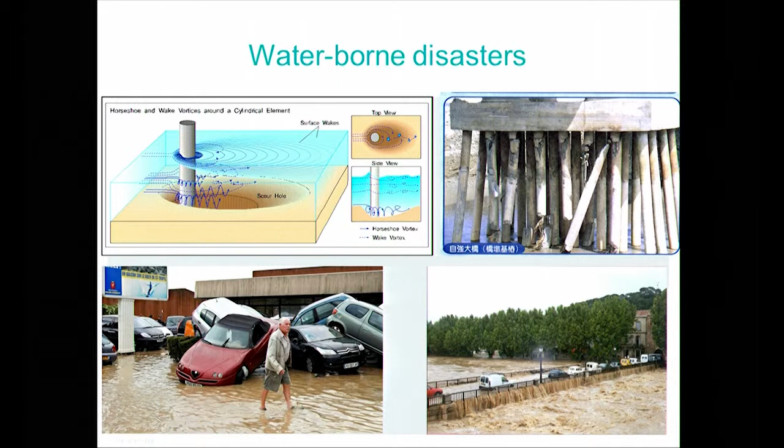And we heard from Claudio Moroni that there is a network of sensors which in principle predict on a short-term basis what will happen in case of heavy rains. This is in France, and this is a threat not only on the structure and so on, but also on the people. This is a people-centric point of view, and also network operation disruption.

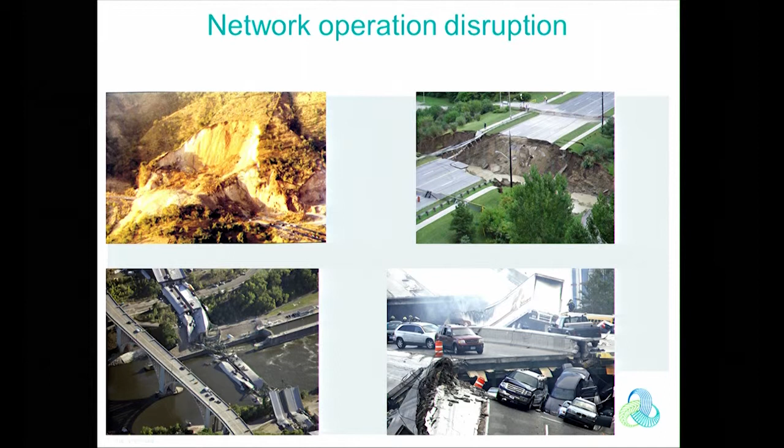At the bottom, you see two slides from Minneapolis. Minneapolis is really an example where this disaster could have been avoided, had you placed sensors and associated algorithms. There's a combination of factors from Minneapolis, starting with some corrosion which was not seen by inspection, but also there were public works on part of the bridge, and these works generated additional loads, but no one was able to estimate or assess these additional loads. And this additional load plus traffic was too much.

So an emblematic example of what could potentially be avoided in the future, and these consequences are not only on the structure and on the people, but also on network operation, because network operation is broken or disrupted for quite a long time. I will show some ways to cope with this kind of network disruption.

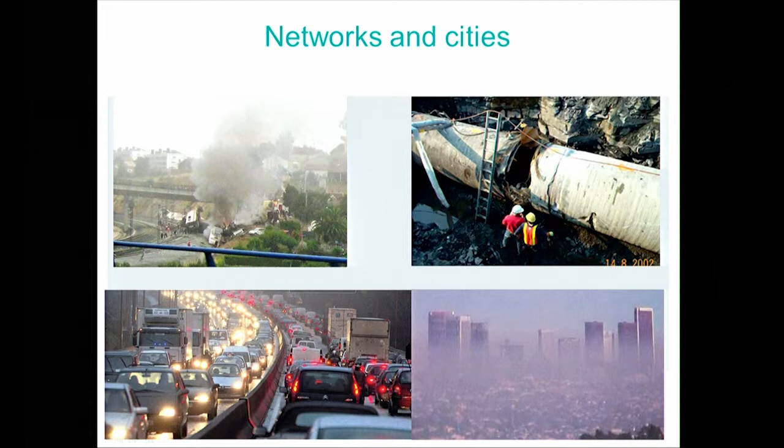And really, the cost of pollution, all in all, over the world is something like $17,000 billion. You see, so it's not small, it's quite enormous. So there are many challenges for monitoring, because the first challenge for monitoring, as was said this morning, is that monitoring is a component of a general system to help you with resilience. But monitoring per se will not prevent failures.

You have to add a decision support system. You have to take action too, because if you don't take action, nothing will change. And you have to take action on a short-term basis, but also on a long-term basis. So there's a whole life cycle analysis, and monitoring is part of this life cycle analysis.

The cost: you cannot place sensors everywhere right now, because the cost of sensing is a bottleneck for deployment. It's the cost of sensing and cost of deployment, because maybe the hardware doesn't cost so much, but it's so complicated to place sensors, to go on site, especially for offshore structures.

There's also a lack of a clear business model for that. Who really wants this, well, especially maybe in countries where it's mandatory for saving thousands of lives. So it's clear that you have to monitor something. But in every country you have a forgotten asset, a gigantic asset, infrastructure for example. I will show some examples for which nobody really wants to pay, and which is very dangerous for people and for network operation.

And part of the story is that very often there is no insurance mechanism, except maybe for PPP, so private-public partnerships, where companies are responsible for operating over a certain period. Therefore they have to be serious about the capacity to operate, and therefore they usually do something with high-tech materials and monitoring.

Another aspect: assume you can place a sensor. Can you place billions of sensors? You see, maybe you have to change your point of view, or the way you consider getting information. So upscaling to the network scale, to a territory scale, this is really an issue, I should say.

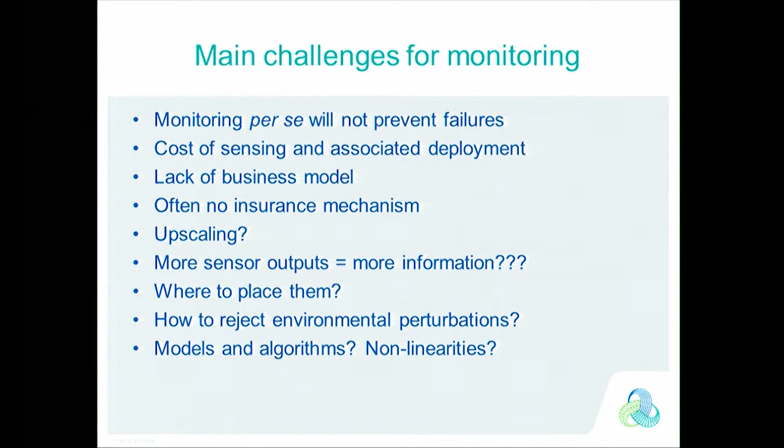Another point is the following paradox: more sensors doesn't mean more information, especially if you compare sensor outputs. You get many data if you compare sensor outputs with physical models, so it seems to be a contradiction, but it's a well-known paradox, for example in meteorology, in 4D-VAR, so to speak. People say, okay, if we use models, don't use too many sensors, because too many sensors hurt our models. So you have to be very clear about that. It's not that easy to extract information from a huge collection of sensors.

Sensor placement, how to reject environmental perturbations, because temperature, as today, is wonderful. It doesn't hurt the sensors, it hurts, I mean, the physical behavior of the structures, for example. A bridge will not behave in the same way; for example, its frequency will change. Even though the sensor has a thermal correction, it's not a matter of sensors, it's a matter of the system itself. So you have to monitor and get information about the system under nominal conditions, which is another issue.

And how to take the best of models, algorithms, and how to take care of the non-linearities—these are questions right now. So there are also very many opportunities right now, and we should, in my opinion, take advantage of these opportunities.

First of all, you have prefabrication, for construction materials, for prefabricated bridges for example. You don't have so many such bridges, but more and more structures are prefabricated, and it is relatively easy to embed sensors during the fabrication process. If you do that, you end up with a structure which is built-in monitored. You don't have to go with additional hardware—the hardware is still there, it's there from the origin.

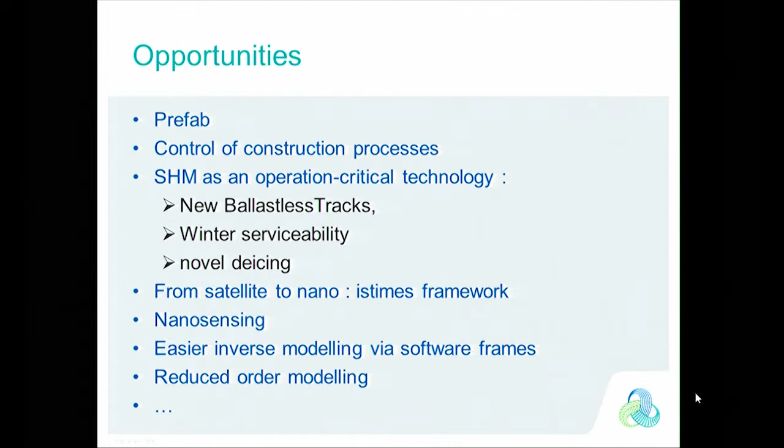Okay, as opportunities, there is maybe the multi-scale approach, from the satellite point of view, which can embrace a whole territory, to nanotechnologies, which will give you very local information on your system. And in between, you have all airborne sensing. And if you combine everything, you end up with what we were able to do, especially with IREA Napoli, the ISTIMES project, which I will allude to.

And also right now, as far as inverse modeling or getting information from models is concerned, you can take advantage of reduced order modeling like PODs, PGDs, etc. So this is technical, I will not enter into the details, but there are novel ways to compute what you have to compute from the data.

We had the chance to work with operators. So this is really a part of the roundtable. Huh? This part, it's a contribution to the roundtable.

We had a chance to work very closely with end users, like highway operators, ASF, so the French Autostrade, per l'Italia, and also airport owners and operators. And so the question was, what is the most important part of the asset to monitor? If you had something to do, what would you do? And they ended up with this list.

The list could be different with different end users, of course, but first of all, the pre-stress level for pre-stressed bridges. Well, in France, we have many pre-stressed bridges. So it came first, and it's very tricky because, for example, when you pre-stress a beam, if it is damaged, you may not see it because it will be hidden by the pre-stressing. So there is some tricky interaction between pre-stress and damage.

Scour, which comes at a reasonably good place, and also something like gantries or porticos on highways, the forgotten asset. You have tens of thousands of such porticos on highways, and they are actually very dangerous for people because sometimes they fall down, and if they fall down on a car, people will die, you see? And nobody cares about that, usually. So it's tremendously important. It's relatively cheap. There is usually no monitoring. So this is a forgotten asset.

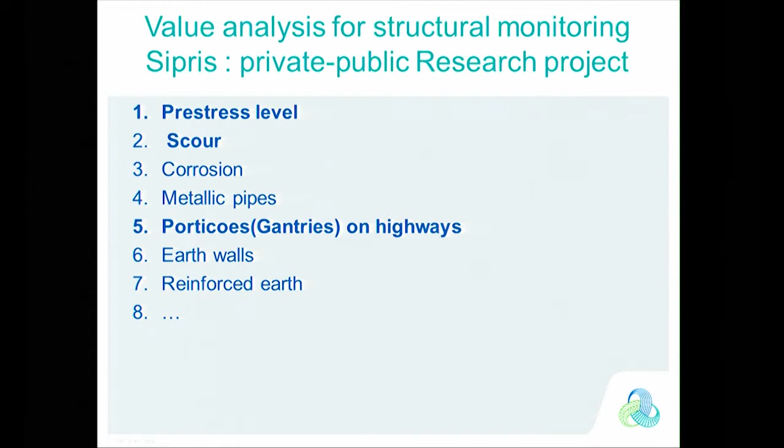And no matter what algorithm you use, at some point or another, you will try to have the predicted observation, what you would predict from the model, as close as possible to the data that are actually measured. Okay, and you have many ways to do that.

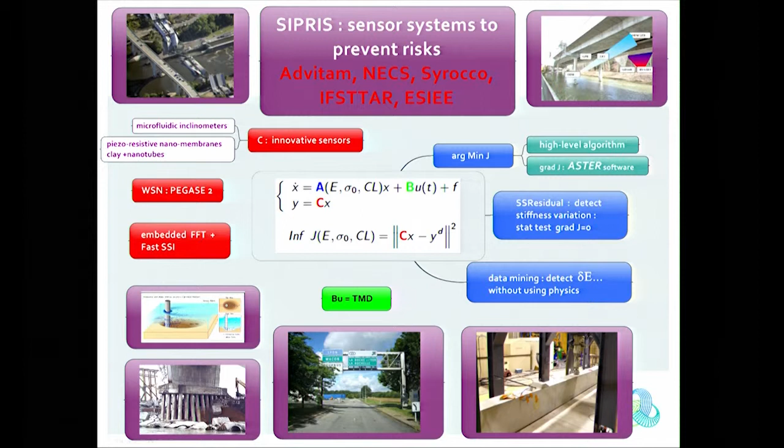Okay, so the idea is that really, if you want to extract information from a monitoring system, you need good sensors, or sufficiently good sensors. You need some kind of modeling whenever available, and you need algorithms. So there is a triptych or tripod. So this is the outline of my talk.

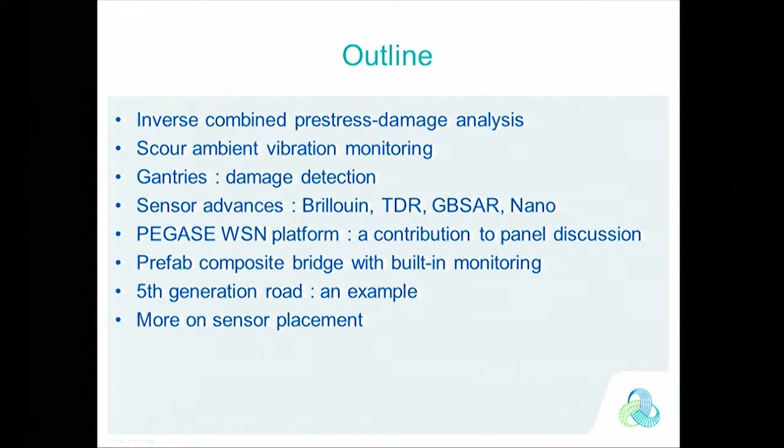I have 20, how many? 15? 15?

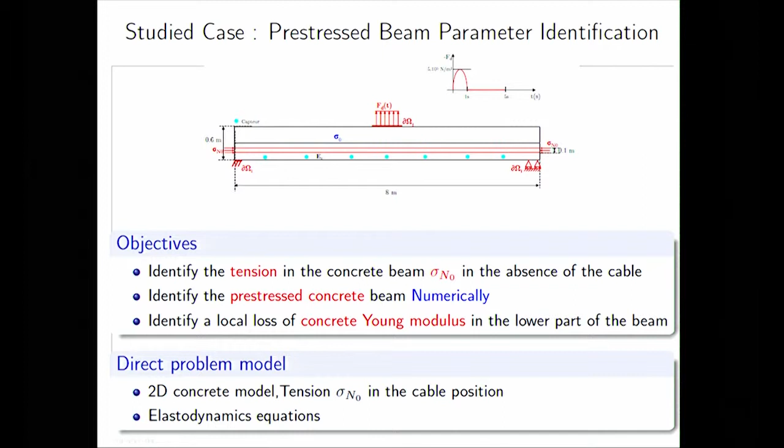20 minutes, okay. So I will start with a topic which might be somewhat complex, which has to do with the way to identify simultaneously the pre-stressing level of a pre-stressed beam, for example, and the potential damage. And to do that, we use modeling. You don't need to look at the equations, well, you can, of course, but you're not required because it's quite complex to comment. But the first comment is that you consider the static stress level, which comes from the pre-stress, okay?

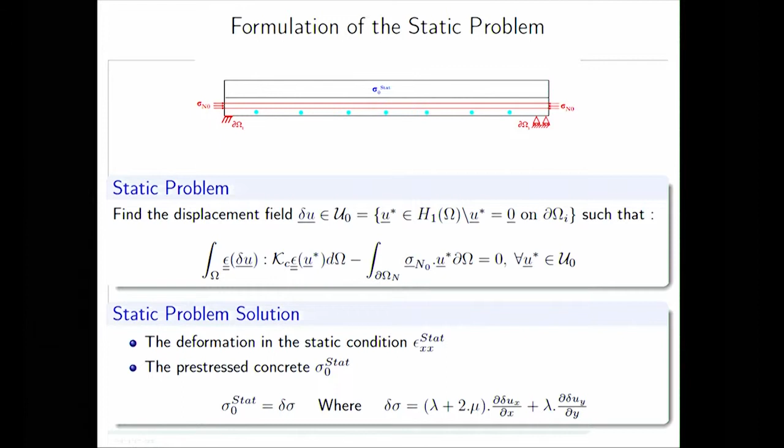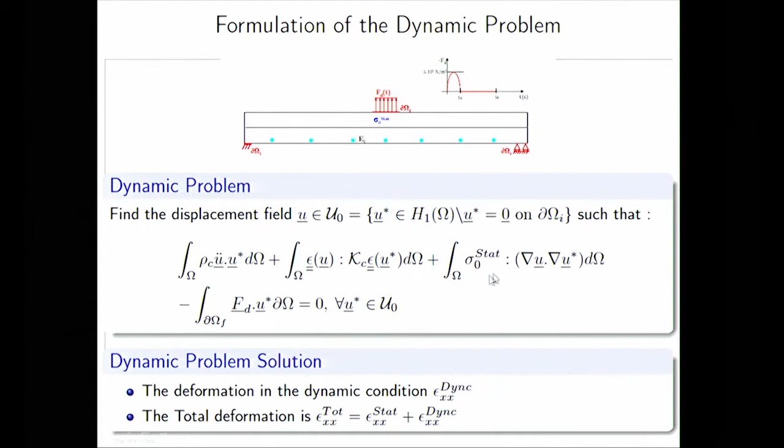And on top of this deformation or displacement field, you will put some dynamic component, dynamic effect, which is due to external loads, okay? And of course, if you sum up the static strain and dynamic strain, you will end up with a total strain, okay? So basically, you have two systems, and the dynamic equation reminds of the static problem by means of this pre-stress component, pre-stress stress component here. Okay.

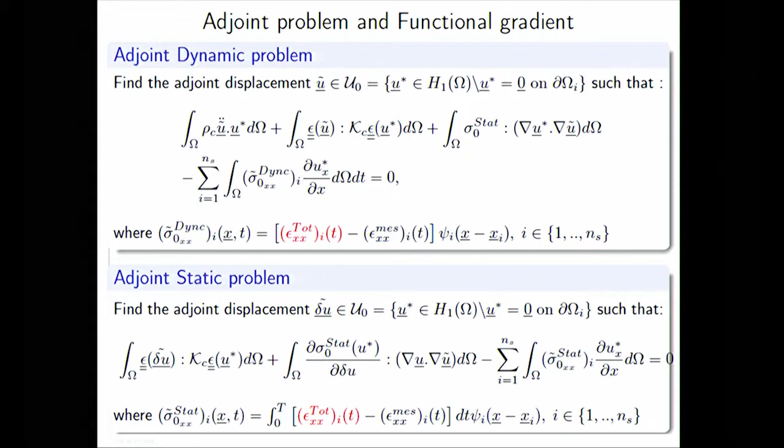Now to minimize the functional, to minimize the data misfit, what you really have to do is put to work a decent algorithm, a gradient algorithm, Levenberg-Marquardt, or whatever algorithm pleases you. But to do that, whenever you have a model, there is a standard way of computing the gradient, and the gradient is given by the so-called adjoint equation. The adjoint equation is nothing but the original equation where now the sensors play the role of actuators. Consider your sensors are actuators, and at these actuators you have some pointwise loads, and you solve the problem. This is the adjoint equation.

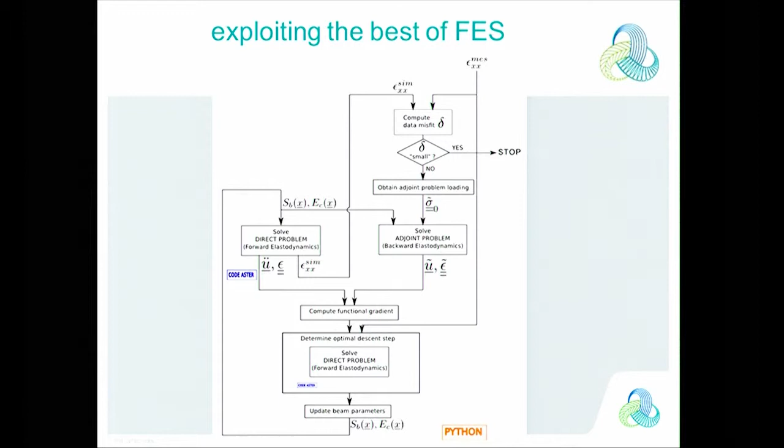Combining the two, you have ugly expressions of the gradient, and you can compute everything, in this case, by taking advantage of high-level software like the Python environment, in which you can program your high-level algorithm, and professional finite element codes, which engineering companies know. And we have a way to couple what comes from research with what is used in the companies. This is a way to do that, because it was our goal. And the result is that it works. This kind of approach works.

Scour. Now I go to scour. Scour is very important, and scour can be formulated like this. You have a structure like a beam. This is a simplified pile, of course. And here you have some kind of stiffness. So the foundation can be replaced by some parameter which reflects the stiffness. This is the Winkler-Westergaard foundation, if you know it, it doesn't matter.

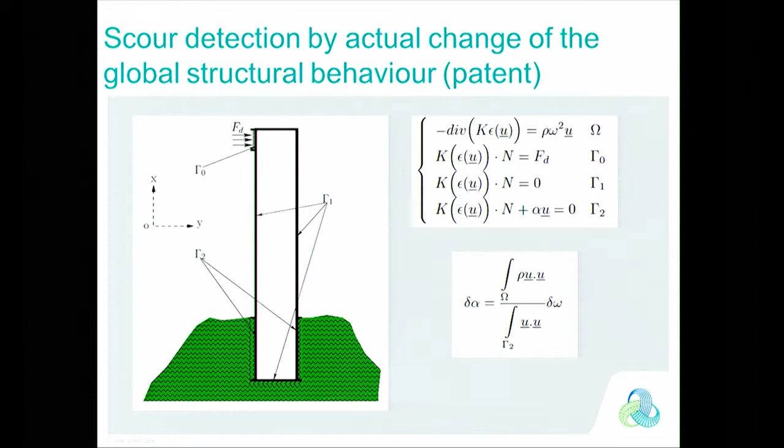This is the stiffness. And by carrying out sensitivity analysis, if you are able to monitor the vibration, the eigenvibration changes, which I call here delta omega, there is a formula which we can pre-compute with the finite element code. You can pre-compute this formula, and you have the variation of the resistance of the foundation, you see? So the stiffness of the foundation is related to the frequency with formulas that you can compute in advance using this kind of finite element code. And you can even get values. This is for the Peyrehorade bridge. This is real life monitoring.

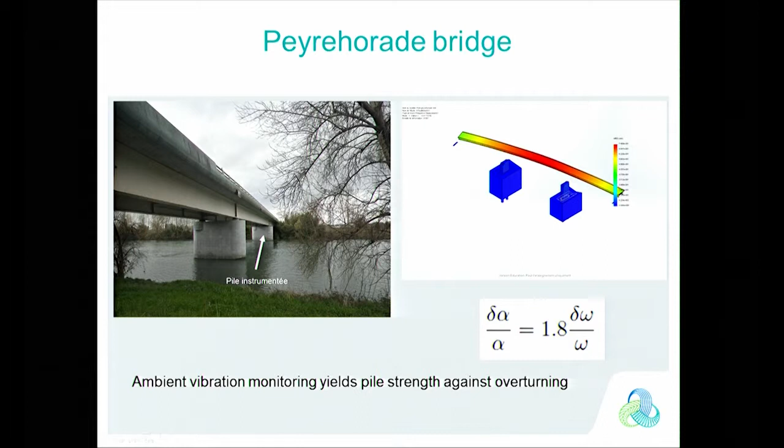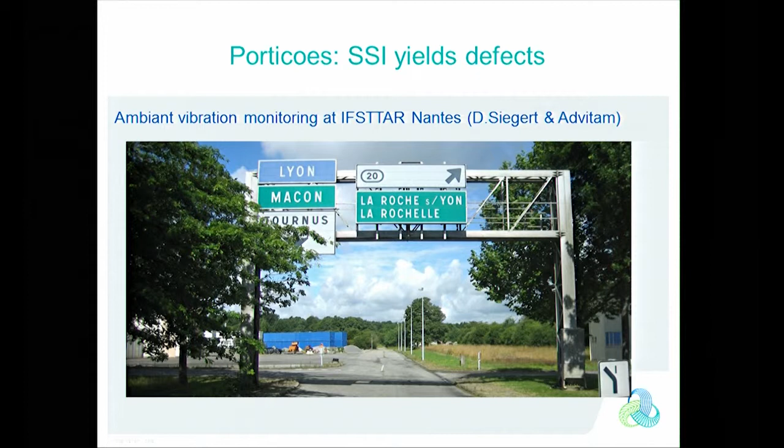Okay. Porticos. It turned out that a portico is something very simple, actually. It's something like a mass-spring system. And therefore we carried out some experiments also with Advitam in the framework of this Cyprus project, and we simulated damages. We will also cut some part of the portico. This is in Nantes, where you will go in July. Whoever attends EWSHM 2014 will see that. So you are all welcome in Nantes because we organize this workshop.

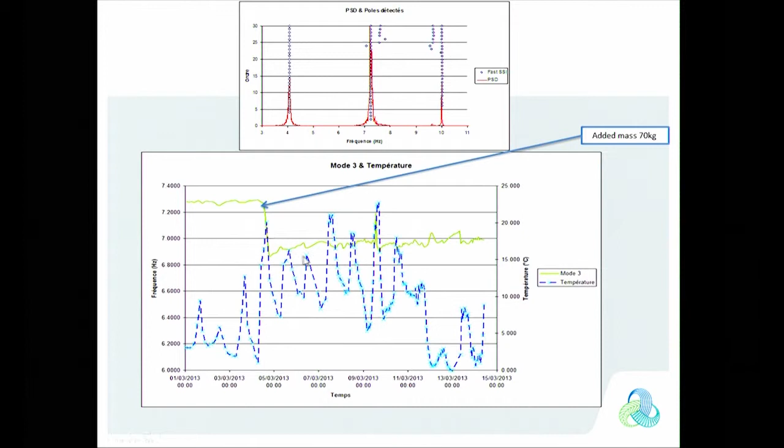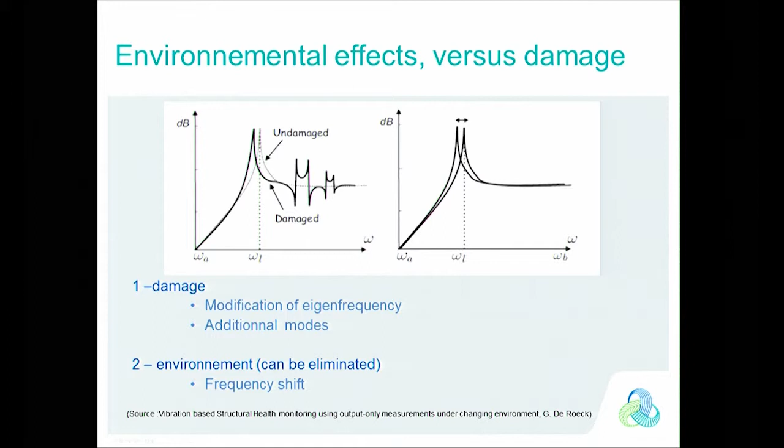If you place an added mass, a small one, because it's a gigantic structure, so this is 70 kilos or something, you see a drop in the frequency. And the temperature doesn't change much, you see? So it's a structure which is intrinsically non-sensitive to environmental perturbations, and for which you have a clear frequency shift whenever you have damage. So it's a perfect type of structure for implementing ambient vibration monitoring. This is absolutely perfect. It's just like maybe a one-story building, if you want.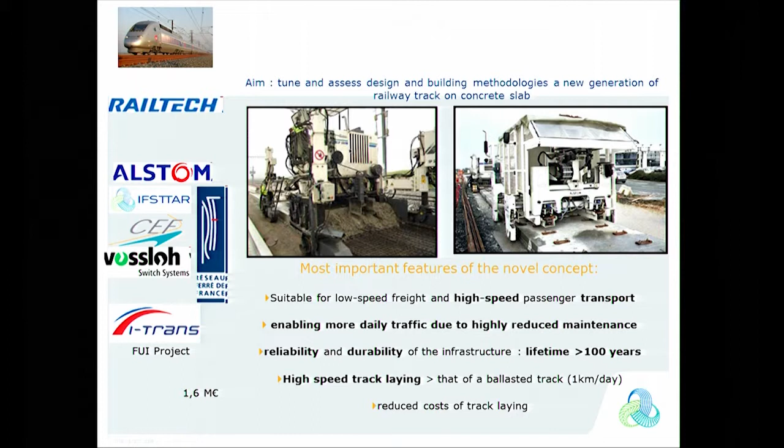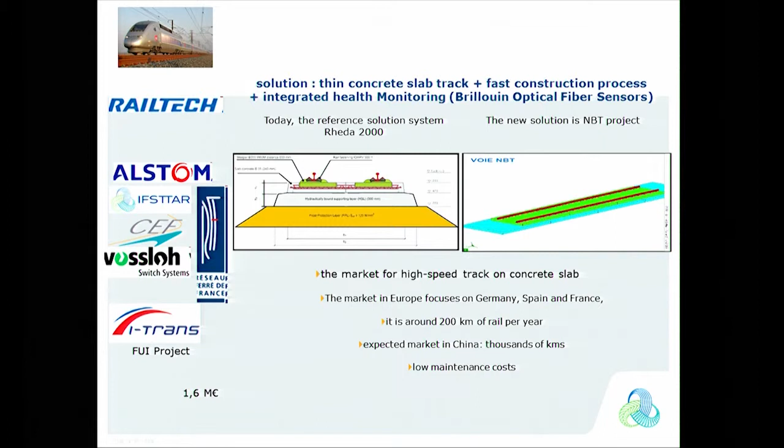Okay, let me go very quickly to railway tracks. I will go very fast with the rest, because I will not have time to give too many details. But this is another public-private partnership, which resulted in novel concrete railway tracks, which are very thin. A concrete track has the advantage of requiring no maintenance with respect to ballasted tracks. So almost zero maintenance. Therefore, you can really operate a modal shift from the road to the rail. The Shift2Rail initiative is based on concepts like that.

But now, if you want the track to be available at any time, then you really have to monitor carefully. And here, monitoring is operation critical. The result is this real track here, which was built only 5 years after the research began. You see, it took 5 years from the white paper, because this structure is completely novel.

Well, because usually concrete railway slabs are very thick. This one is very thin, so it's very innovative in some aspect. So it was one with Alstom, Railtech, and big companies, and it is entirely monitored on site, really.

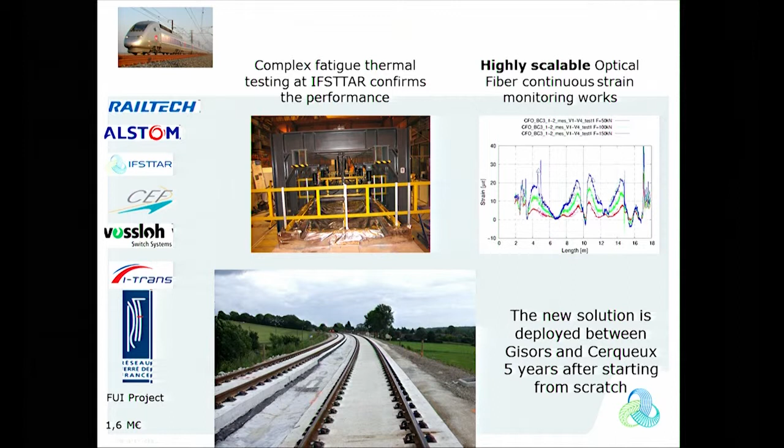And the idea is that a Brillouin type of fiber optical system, and it has been validated at the lab, yields a continuous pattern of the strains. Okay, and it works. Okay, I will skip the details. I will skip all this.

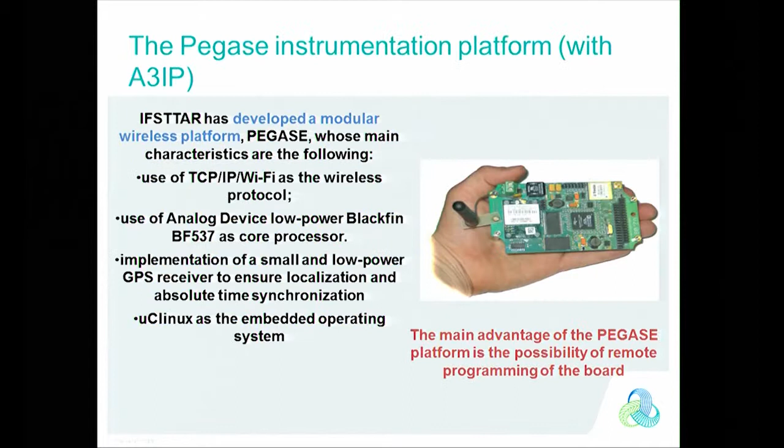What I want to show maybe is development of a wireless platform which is quite general and which has been customized for freeway operations like weigh-in-motion and structural condition, but also for water networks, smart water networks, you see. So this is a generic platform which has been licensed to a company and which is now sold quite broadly.

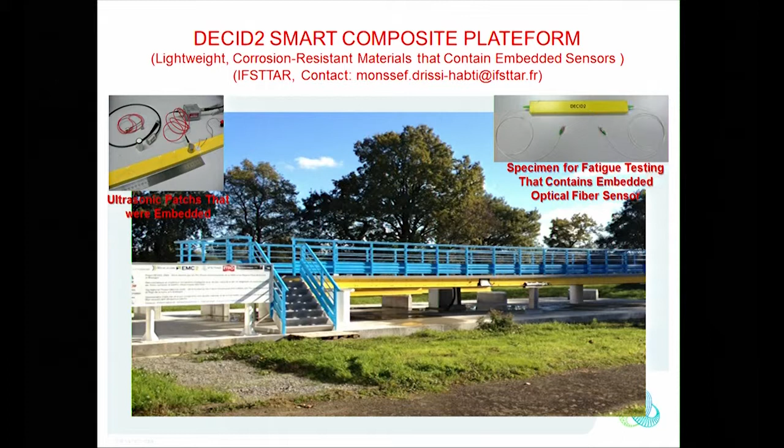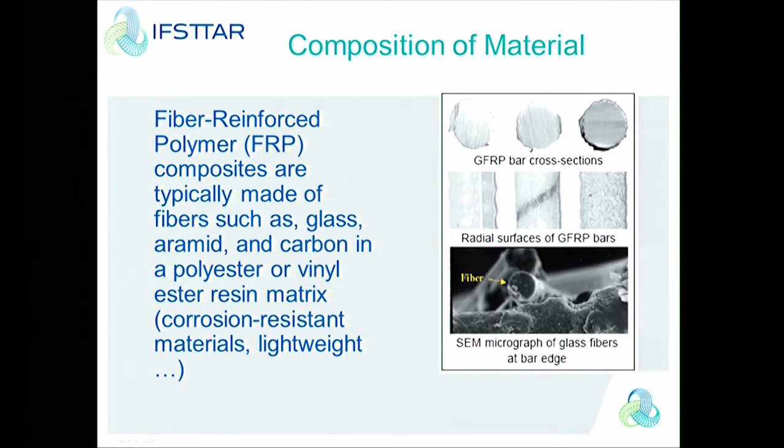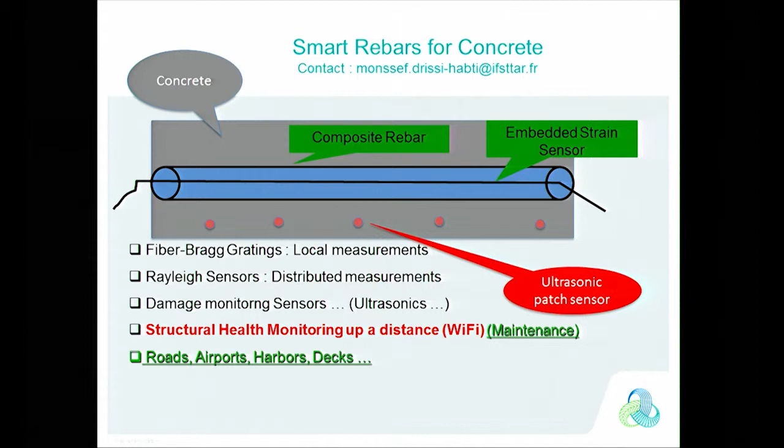So you put this bridge on your truck and you can go to the site, and after a few days or maybe a week, you can have a new bridge, with maybe reduced capabilities. And this kind of composite bridge is intrinsically monitored by ultrasonic sensors, by Rayleigh sensors for continuous strains, etc. Okay, I will skip this.

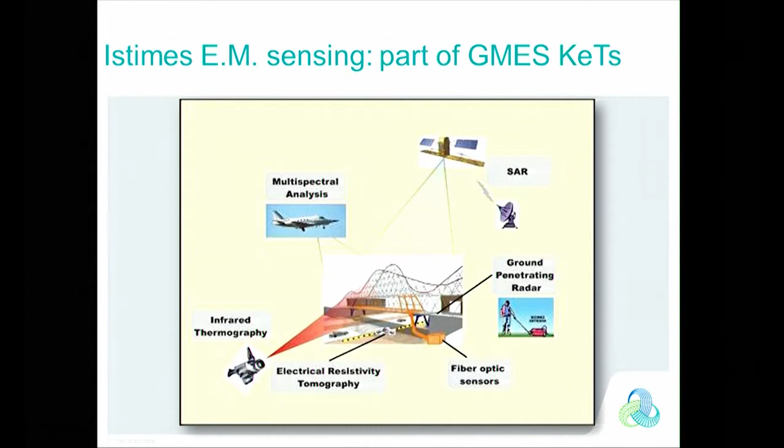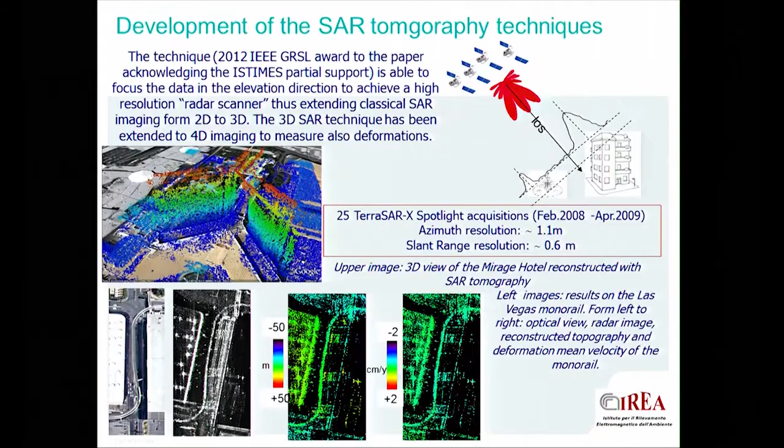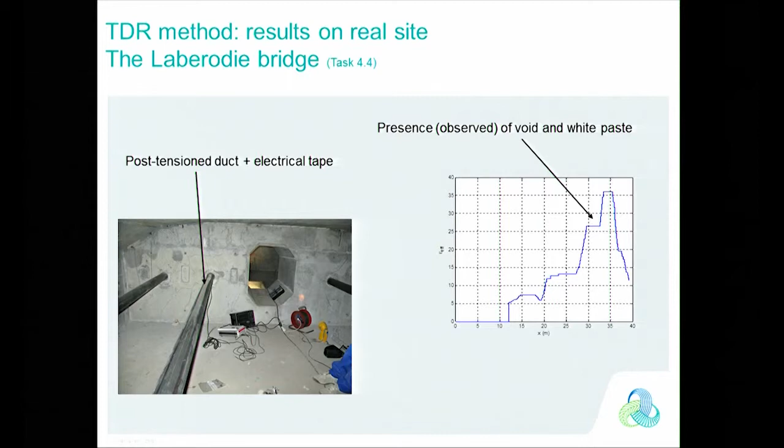So the good idea is that you can really monitor at once a whole structure from the sky, with TerraSAR-X type of sensing devices. So I will skip this. This is another kind of electrical tomography. I will skip this maybe.

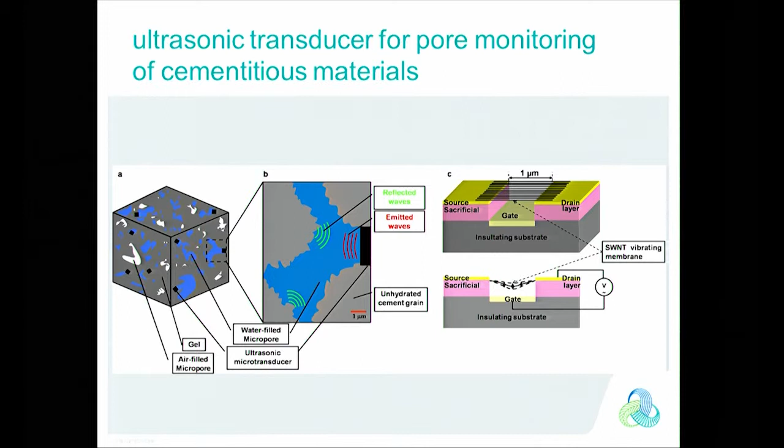And yes, I come to another way of conceiving sensors, which is nanotech. For example, the extensive use of nanotechnologies can result in very novel sensors for which the unit cost can be very small. So the idea is really to kill the cost. It's a cost killer. It's not just for putting nanotubes everywhere. We don't care about that. But an example, which was patented quite recently, is a novel weigh-in-motion or load monitoring sensor.

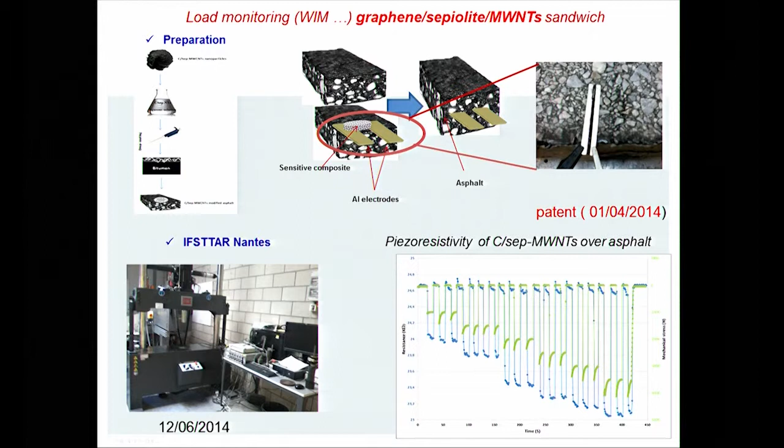This is a load monitoring sensor, which is made of graphene, sepiolite, which is essentially clay, and nanotubes. So everything's doped, and you end up with a sheet which is compatible with construction materials. So you can really put that in asphalt and so on. It works because it features interesting piezoresistivity, and therefore these are distributed strain sensors which you can produce. There is a process, you see. I'm almost finished, maybe two minutes.

I will not really comment on that, but there is a relatively recent result regarding inverse modeling, or the way to extract information from the sensors. When you want to minimize the data misfit, this is equivalent to solving another problem for which you have a finite element approximation with a mesh made with a node where you have sensors. So at every sensor location, you put a node, you create a mesh, you create a P1 Lagrange approximation, and you have a dual problem, which is equivalent to the original one.

Therefore, sensor placement can be viewed as a way to increase the accuracy of the way you solve your inverse problem. Inverse problem and sensor placement is equivalent to solving a mesh refinement problem. And you can also explain by that if you have too many sensors, maybe you will have an ill-posed problem. It's quite classical in finite elements. The more you refine, sometimes you have a lack of coercivity, as they say in Pavia. And this explains that the more sensors you have, the more sensitive you are to sensor uncertainties, etc.

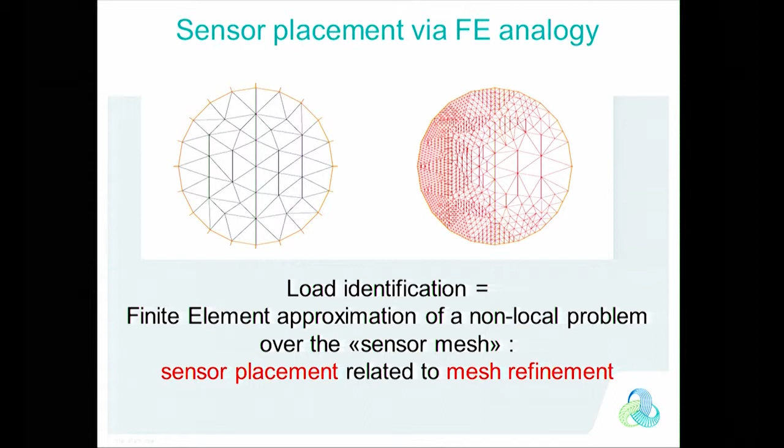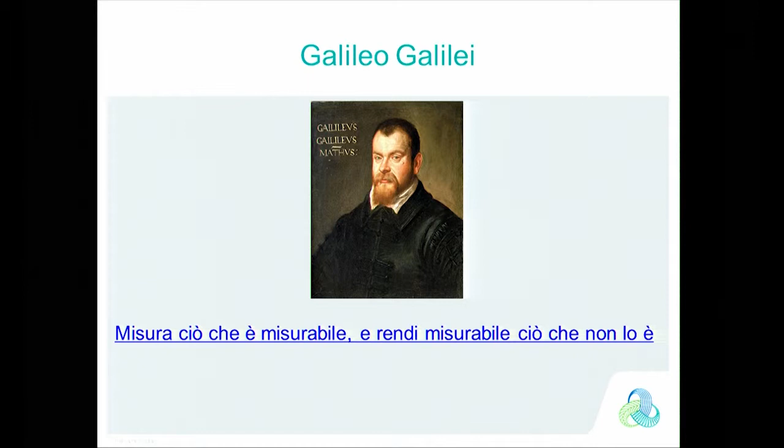Okay, and last but not least, I have to finish with that: whatever we do in monitoring is indebted to our great master, Galileo Galilei.